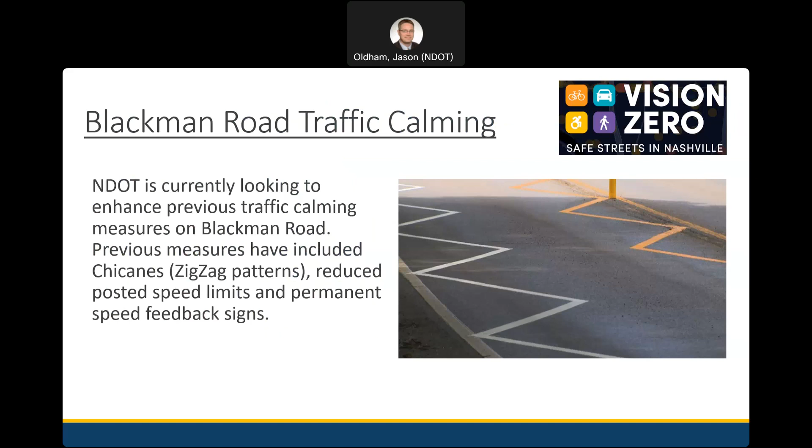Parking, is that bad? Is that okay? The parking lot. Okay, so that's not good.

And I think, you know, nationwide, from the freeways, once they start getting jammed up, thanks to Google Maps and others, then our arterials fill up, signals every 1,000 feet or whatever, start bouncing you into local streets, so, or collectors.

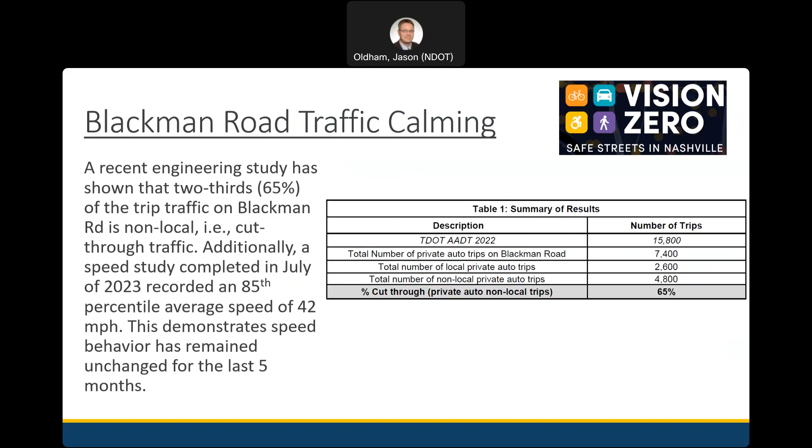From 4,000 ADT to 6,500 is kind of the range of what cushions can handle.

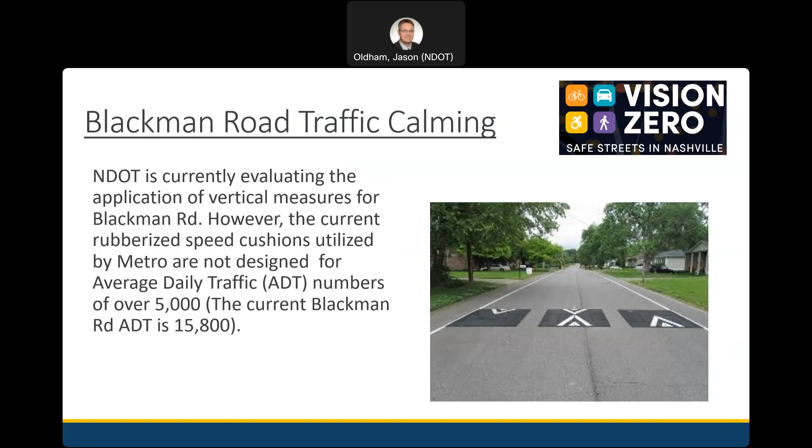I think there's a slide here too. This is with the cushions, raised crosswalks, even raised intersections - these are some of the application tolerances.

4,000 to 6,500 for speed cushions, humps, and tables. Traffic Logix is who we use. There's a 5,000 max ADT. What they're really trying to do with this 5,000 is let you know, if you want 5 to 10 years of cushion staying on the road and not getting knocked into the ditch, within the first or second year your ADTs need to be at this level. You get higher than that...

Memphis actually has a great presentation, saw that last year. Memphis has a traffic calming program, and they have some slides of roads where they put cushions out - the rubber material - and there's just chunks of cushions all over the place that have been knocked out of the asphalt. So they definitely have challenges applying those. They probably have the highest - actually, I don't know if they still have 7,000 ADT, they've changed that recently, but it's the highest in the country.

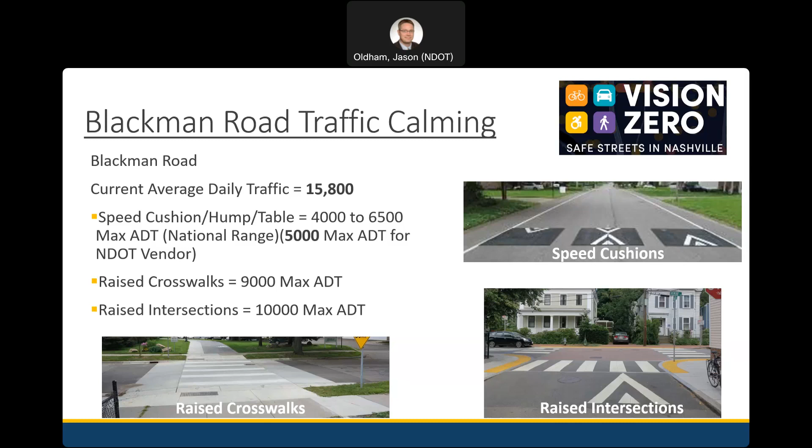There's a YouTube video of somebody shooting some police videos - a police car goes airborne. Those are kind of what you're looking at as far as volumes, and again, Blackman is just really high volume.

So I was looking across the ocean to Europe and also Canada - they had some applications. These are - we've done some flex posts before in the little zigzag area. Unfortunately, I think where those posts are, it was kind of going downhill, and you ended up running over them before you'd see them. So these are a little bit different - almost like your crosswalk gateways where you have a larger piece. You can see there, it's 50 kilometers an hour, and you see the larger sign on the center line.

And you see basically a linear flex post, 36 inches, right at the white edge line, and they have these staggered. That picture on the left was from the manufacturer's website after they were installed. This is a Google Street View that I pulled today - you can see it's worn a bit, so it's been hit, but it's still there. These are more heavy duty, not some of the cheap posts you've seen on the road. There's even some posts out there used on freeways by DOTs that can get hit at 70 miles an hour and are still good and ready for the next car. So I took that and modified it just a bit.

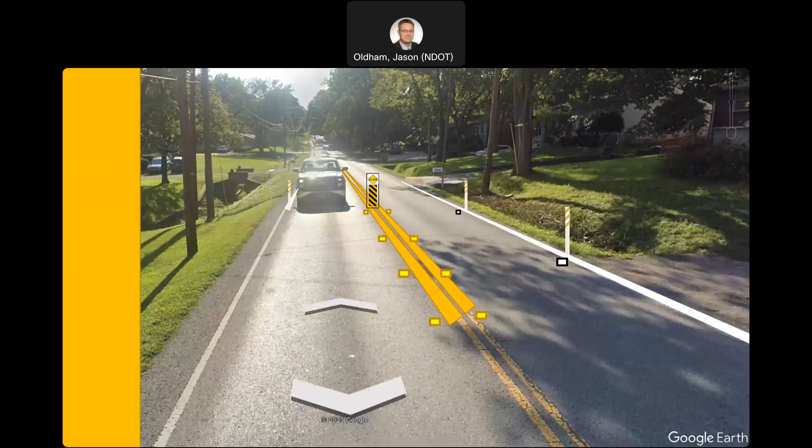I've got an example, I can't remember exactly where I did this. Somewhere in the straightaway, the freeway section of Blackman, past Timberdale. This is just kind of an example. Okay, so you guys know your road, y'all have probably waited at the edge of your driveway long enough to memorize everything about it.

So basically we have a white reflective marker here, not only to emphasize where the post is but to help line up the vehicle, so they get a heads up that if they're not lined up, they'll feel a little bump, the little marker, when they go over it with their tire. It's not going to be huge, but everybody's going along the yellow line here, so you hold up a little marker, have it out there. We don't do this a lot, we don't do these three markers, but on the freeway, on TDOT roadways, you'll see it.

So those little bumps are going to slow this traffic down? No, not so. The pinch point will slow the traffic down.

And how many pinch points? So in Canada, it was every 300 feet. What I'm proposing in places is 400, so the sign here, there would be another sign 400 feet away, another sign 400 feet away. What I'd like to do is not do our road all at once, but pick out strategic locations to do an array of like 1,200 feet, so you have another array of 3 pinch points, just to measure the success of this, because we haven't really done this type of application here at Davidson.

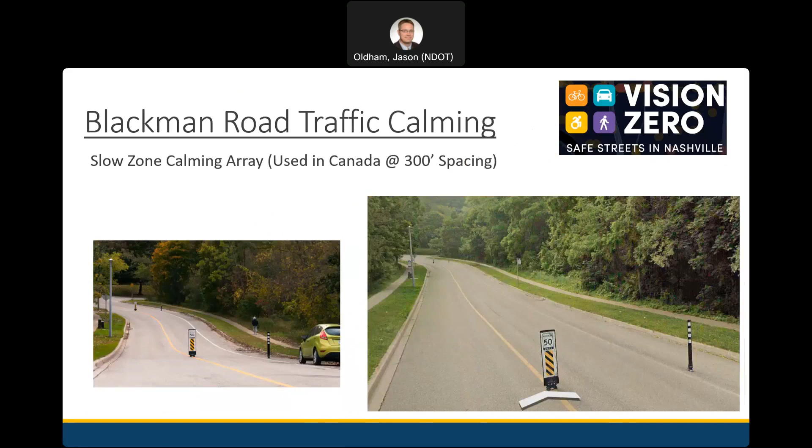So what you're talking about is the passenger vehicle, correct? Or it would be the dump truck, like the one I saw probably driving 50 the other day - construction crews, people cutting trees, school buses, they'll cuss you out. And then, let's see, I saw a tractor trailer. Yeah, because I work from home, my view is out that window. I don't know, would that work for that? Because the dump truck will run over people.

So I asked to go over this presentation a couple days ago so I would know what we were going to discuss. And I live on the corner of Blackman and Salem, so I'm fully aware of the traffic on Blackman, and I have been since I moved in.

Blackman is too high a volume for the typical traffic calming program. It's not a street - even though we put in the radar feedback signs and all that - it's really not enough. I've worn y'all out, haven't I? Well, it's mostly Brad Bruce, but I've worn them out about wanting a vertical measure, meaning something you drive over. Because that's what I know slows people down. If you don't slow down to go over the hump, it's gonna hurt your car. So that's a fair trade, but it works.

So personally, to hear that the volumes were so high, they weren't even a little bit - I mean, I think even if they were 7,000 or 8,000, I could have probably twisted their arm. But it's like 3 times as much volume as what the manufacturer says to use. So if they start to fall apart, like he says happens in Memphis, and it causes damage to cars or causes a wreck, at that point, because we've gone outside the manufacturer's recommended specs, Nashville Metro is in a liable situation, which is not what we want. And I don't want someone to get hurt either. So at that point, they're looking at what can we do with these high volumes.

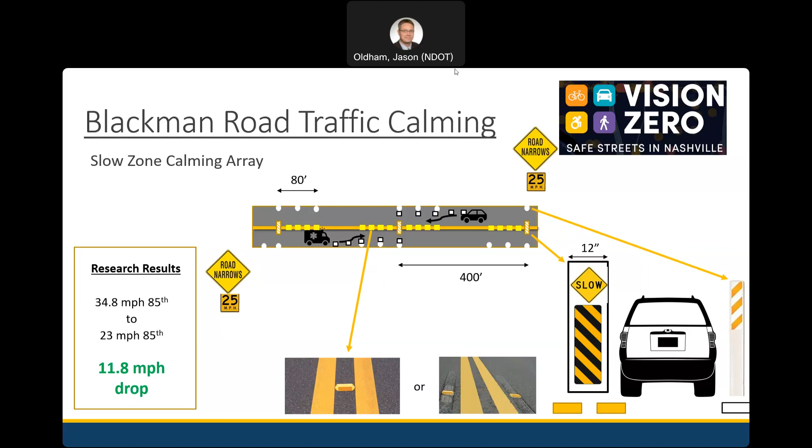Well, we're happy for you to continue to keep testing. More the better, right? And thanks for making yours the pilot. Yeah, let's see here, gotta get the next one up. Road cushions that you're wanting to, would be great too.

Okay, so you're switching over to Harding Place? Yeah, I'm switching over. So the Harding Place thing is something I've talked to the Caldwell Ivy Neighborhood Association about before, so this isn't new to them, but maybe new to some of the Creek Hall folks. So Harding Place is like mini I-65, even though it is 100% residential street, except for there's a church.

But it's just always blown my mind how fast people are going. It's obviously a drag racing strip. We've had a neighbor who died when he was rear-ended just trying to turn into his driveway.

So you can imagine the challenges we've had trying to figure out traffic calming applications for Blackman Road. It's exponentially worse for Harding Place, which is basically a small interstate. Volumes are, I don't even know what the volumes are. Do we have volumes on Harding Place? Have we measured that before?

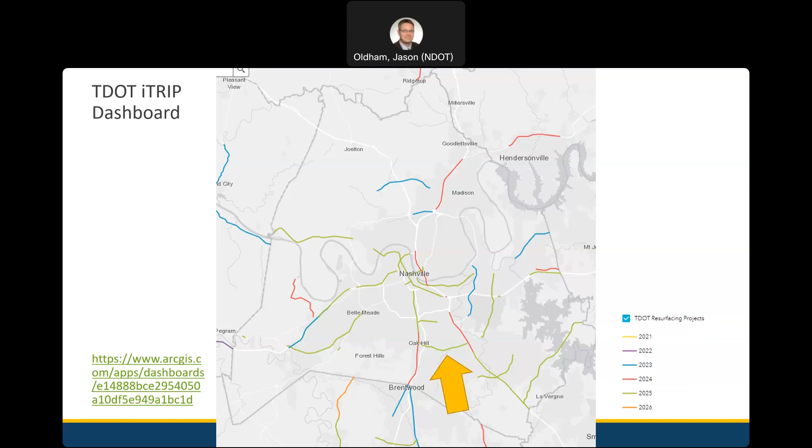So zoomed in, TDOT plans to resurface Harding Place from I-24—it actually goes all the way to Franklin Road, but Nashville's jurisdiction stops at 65, so that's what we're focusing on. I believe it's Forest Hill, maybe—Oak Hill is across the street there. So this is our area of focus.

Yeah, what did you say for your jurisdiction? Metro Nashville doesn't manage the roads in our satellite cities—so Berry Hill, Oak Hill, Forest Hill, Lakewood, Goodlettsville.

So quickly, here's a map overview with our Vision Zero plan. We have our higher injury networks. You'll see the yellow, orange, brown - that's for tiers: low tier, mid tier, high tier. Harding Place is completely on our high injury network.

Council has allocated, through this most recent operating plan surplus funds, $3 million of Vision Zero improvements on Harding Place. We are looking to implement a lot of enhancements on this corridor in coordination with the plan resurfacing. Harding Place also has a bunch of dots - these are high injury intersections. The gray dots are priority intersections, the orange dots are general high injury intersections, and the pink dots are pedestrian. So Harding Place is a dangerous corridor for vehicles, for people, for everyone. We're looking, in coordination with this resurfacing project, to try to address a lot of these systemic issues on this corridor.

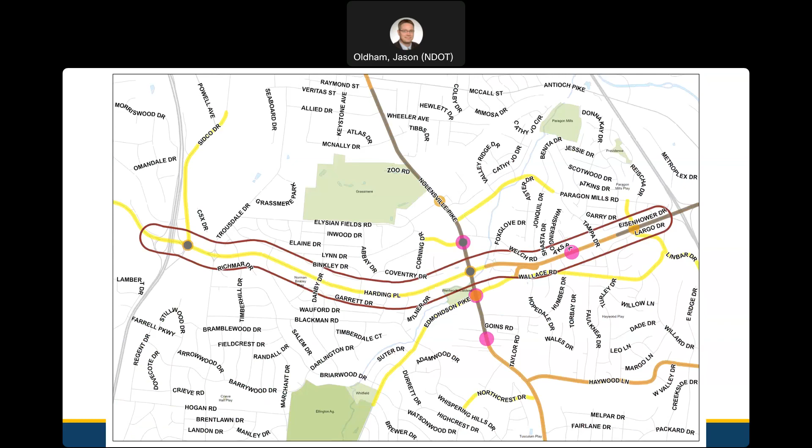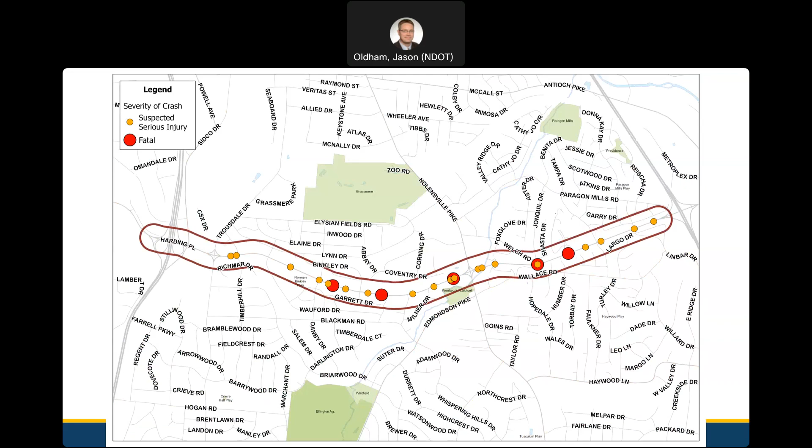As you mentioned, there was a fatal crash west of Nolensville Pike a couple weeks ago, and another fatal crash on the east side of the Pike last month. This is showing the serious injury and fatal crashes that have occurred since 2018 on this corridor. We see more crashes west of Nolensville Pike, and more pedestrian crashes on the east side. But the corridor is dangerous overall - high speeds, high volumes, lots of things going on, distracting the driver. It's a stressful road. We're looking to try to resolve and address all these issues.

That being said, TDOT has also looked at these corridors and has already identified and is moving forward with some projects. They've conducted PRSIs, pedestrian road safety initiatives, including one on Nolensville Pike. I'm sorry, I shifted the view on you - Harding Place is now up and down, 65 is at the top, 24 is way below. So this is Nolensville Pike, south to downtown.

TDOT has already identified some enhancements they want to do to address safety deficiencies on Nolensville Pike, specifically at Nolensville Pike and Harding Place. They are planning to invest significant money in this intersection to make it safer, slow cars down more, and make it less stressful. So in coordination with our funding, TDOT is allocating additional resources for this corridor as well.

That would be the same? Yeah, TDOT works a little slower, but the hope is it'll all be implemented together. Those are roads and TDOT roads. Right, Harding - that's two TDOT roads coming together. Yes, Harding Place is a TDOT road. So we have to go through all the hoops and permissions and coordination to TDOT standards, but we do that frequently with coordination. And then those roads - right. Yeah.

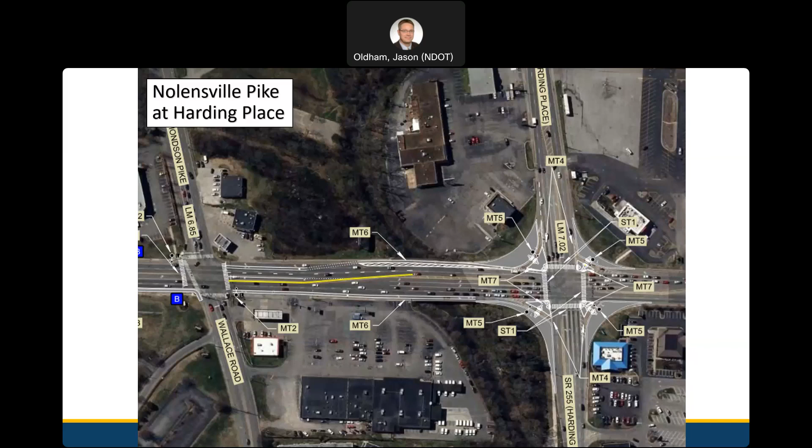Additionally to Nolensville Pike, TDOT has also done another road safety audit on Harding Place near I-24. They've identified a similar intersection improvement at... that's off this resurfacing project, but at Linbar Drive they are proposing on Harding to try to slow down turning movements and improve some of the pedestrian accommodations at the intersection. So we're accounting for these projects in coordination with our project.

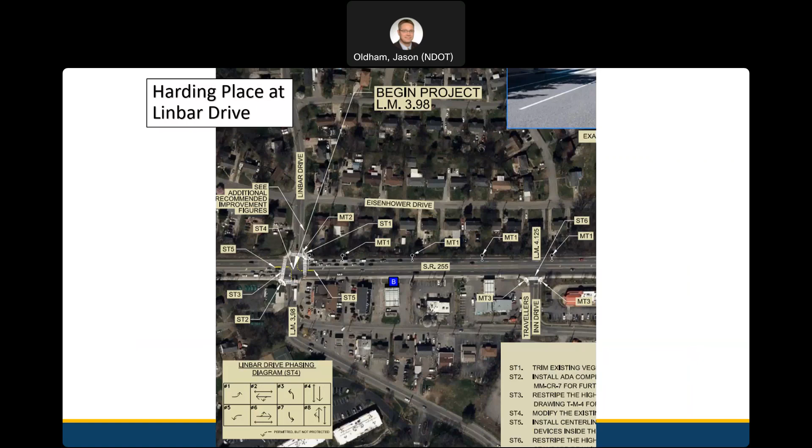So that being said, the concept we are approaching for Harding Place, west of Nolensville Pike, is to install a raised center median for about the entire segment from Trousdale to Nolensville Pike. Existing, you have about 56 feet of pavement from white line to white line, jumping down slightly in some areas. What we're proposing is 10-foot lanes and as wide a median as we can, coordinating with beautification groups to install trees or shrubs that TDOT will permit, making sure we're keeping visibility while also coordinating.

Can y'all see the numbers - what's existing is 11-foot drive lanes, a 12-foot center lane, down to 10-foot drive lanes. And the median - 15 and a half, 16 feet - yeah, 16 feet in the middle will be taken up. So again, it's not visually narrowing - well, there will be a curve there, yeah.

So I think you guys are all familiar with the current geometry of Harding Place. Their driveways maybe every few feet. We cannot accommodate every driveway to have full access and also install the medians.

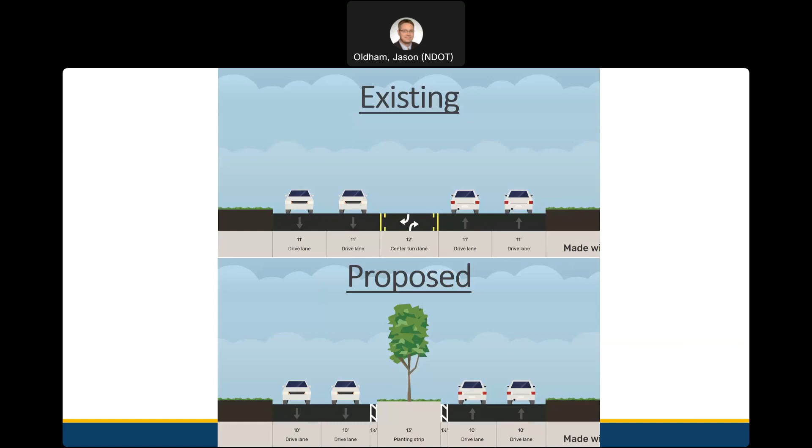So we will be changing some of the access where it's going to utilize U-turns. When we lived in our house in 1987, there were no circular driveways, where driveways had 2 entrances into Harding Place. Then one popped up and I said, great idea, I want one. Then I called Metro, can I have a circular driveway? No, we can't. I'd rather ask - a place that has a lot of circular driveways, one driveway has 2 entrances onto Harding. Has anybody thought about the fact about one house, one home, having 2 entrances to Harding?

Might be some that are grandfathered in, some that maybe didn't get permitted, some that had a variance through the BZA for example, or they might have frontages that exceed the 100 feet where they could have private access.

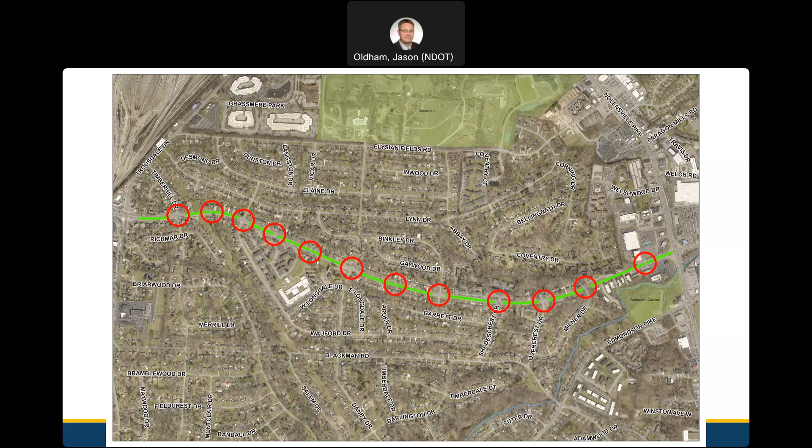That's not what we are pursuing with this project. We're looking to - I'll go through some quick facts and we can go back to that.

Isn't that trying to move traffic off or move traffic on, or just trying to slow it down? Right, yes. So I'm not seeing any traffic flow.

I've lived there, I have seen 3 deaths. The neighbor across in front of us was sitting in the turn lane. Dragsters from Danby came down, killed him in the driveway. We're out there screaming, directing traffic. Every day I see tractor trailers, tankers going 60 miles an hour. Every morning I see a Metro school bus trying to stop traffic because kids are trying to get off the school bus, and from west to east they don't even see the school bus.

Yeah, and so some of the facts - Blackman slowed down, yes, correct. I personally want everyone to slow down. The entertainment vehicles downtown that everyone hated, I loved - it was forcing everyone to drive slow. It was making it safer to access.

One of the things about the intersection improvement you're talking about, Harding and Nolensville - it'd be interesting to know exactly what TDOT is going to do. NDOT had applied for a federal grant for the improvement, and I don't know exactly what they were gonna do, but it was literally gonna be from 440 all the way to the Nolensville Harding intersection. It was gonna be a massive change there, and we didn't get that grant funding.

You might then see a potential increase in travel times. The traffic's always going to be there - gridlock is always going to be gridlock at the peak hours. We're not changing the travel lanes, we're not adding travel lanes, but through some of these changes we may be able to better accommodate what's there.

So there's national research that has analyzed a number of different implementation strategies and measures of effectiveness, and there's clear data that shows a raised median on these types of urban roadways, based on these conditions, results in a reduction of crashes of about 30%.

What does that mean? In your area from Nolensville Pike to Trousdale, there were 425 crashes in a 5-year span. A 30% reduction - 2 of those were fatal, 11 were serious injury, 99 crashes calling the ambulance, police cars, closing the lane. 170 of those were during your peak hours, so that probably doesn't help any of your congestion.

So that reduction - we could see 30 fewer crashes on those roads per year, giving a more consistent drive. Now maybe if we can make Harding Place more consistent and safer with fewer crashes, people will less frequently drive on Blackman. Hopefully.

Narrowing the lanes and creating a center median will force drivers to feel less comfortable. I'm sure when you're driving, especially in non-peak hours, drivers feel like they can drive as fast as they want because they have that center turn lane for forgiveness. It feels open.

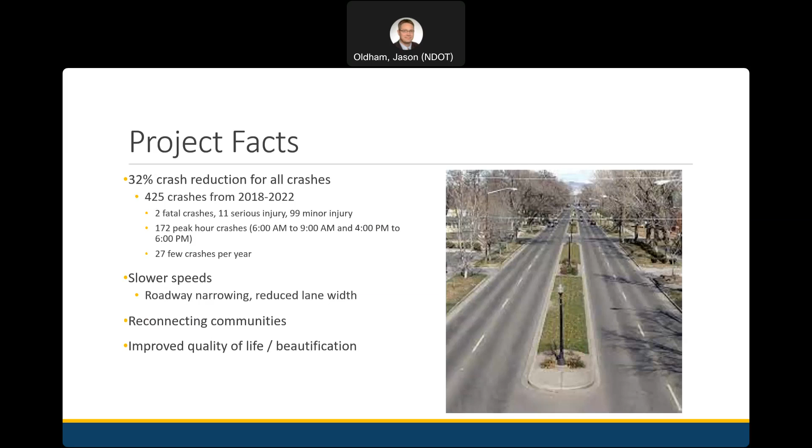So I can ask about it, but the answer is probably no. We're probably stuck with 2025. And honestly, the way that TDOT works, I'm hoping that 2025 sticks. It could get bumped to 2026. But I can ask. For me personally, I know you guys want this as soon as we can get it.

One year is to do the design, to do the permitting with TDOT, to then do stormwater coordination, survey and everything. That's going to be 9 months or so. So even if it's going to come next year, I don't know if we would be ready to fit it into that schedule.

So this is a rough schedule, a timeline of events, and then I'll come talk to you. So this fall and this spring, we'll work on finalizing our concept, coordinating with TDOT on high level approvals, and then we'll be moving into survey, design, coordination, and approvals.

What we'll need to do too, with our project, is TDOT will then need to accommodate the new striping plan and signage, those sorts of things. So we'll coordinate with them, button that up. We'll then start construction during the winter or early spring, and the resurfacing program will not resurface in cold weather, so they won't start until springtime. We'll begin hopefully construction at the end of next year, and as soon as that's done, TDOT will come in and resurface and stripe.

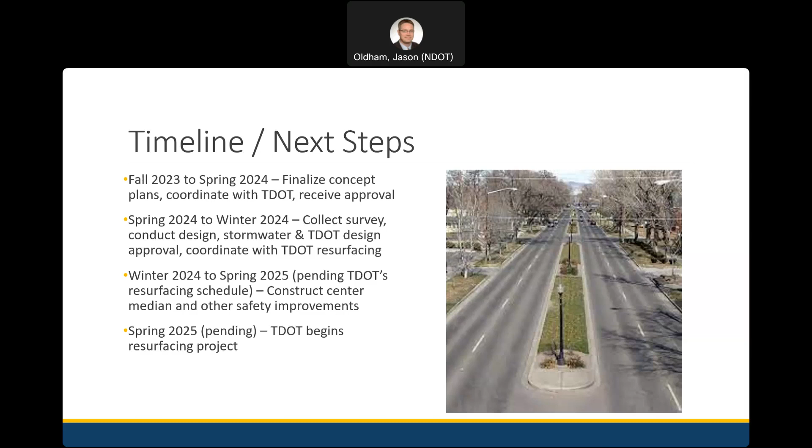We as neighbors are trying to use sources that are public. This was a consensus, and some neighbors came and saw, some are new. This is about the proposed development on the corner of Danby and Harding Place at South Minister. They had a meeting as recent as September 30th, and we candidly refer to ourselves as the corridor neighbors. Traffic impact of potentially 124 cars based on just the units - maybe it was single or double - we just want a study, we just want to know as neighbors.

You mentioned the traffic - you can ask for their traffic study, or you can do an open record request. Once they submit to us, you can do an open records request for us. I don't know if the staff reports from the planning commission have the traffic studies as attachments, but if you ask the developers for it, since they're asking for your approval and support, they should be able to provide it most times. You can either do an open record request through us or work with the developer.

And there's nothing to request right now because nothing has been submitted. They will be required to, though. Metro Legal right now is in the process of determining whether or not what they're wanting to do is going to require a zone change. I have a feeling it's going to require a zone change, and at that point it's a whole different ballgame. Yeah, we're hoping for that.